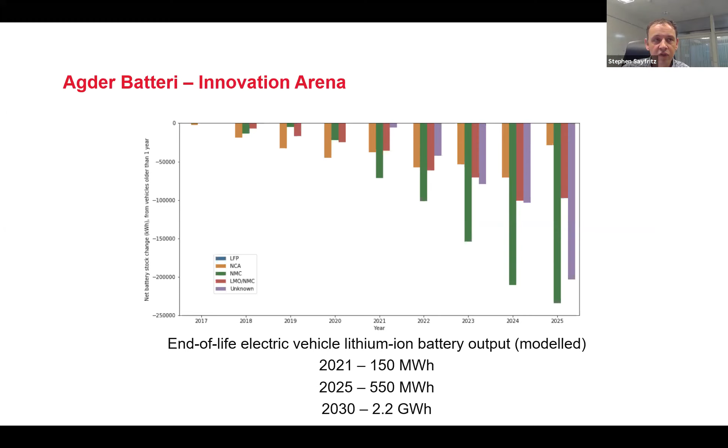When we do the analysis of what we then expect to come back from pure end-of-life batteries, not other reasons for batteries being returned from the fleet, we see there will be quite significant amounts of batteries returning within the next few years. And then there's the question: what should we do with these batteries? What opportunities are there?

When the batteries return, there's the possibility to either reuse them, which we'll speak about today, or recycle them.

Within the recycling side, there's a big initiative with a cooperation between Hydro and Northvolt, run by Batteriretur, who will speak today, to recycle Norwegian batteries and reuse the materials in new batteries produced by Northvolt in Sweden. As another quick note, today's news was that Hydro, Equinor and Panasonic agreed a memorandum of understanding to look at cell production in Norway. This would be the third initiative for cell production in Norway, in addition to Freyr and Morrow Batteries.

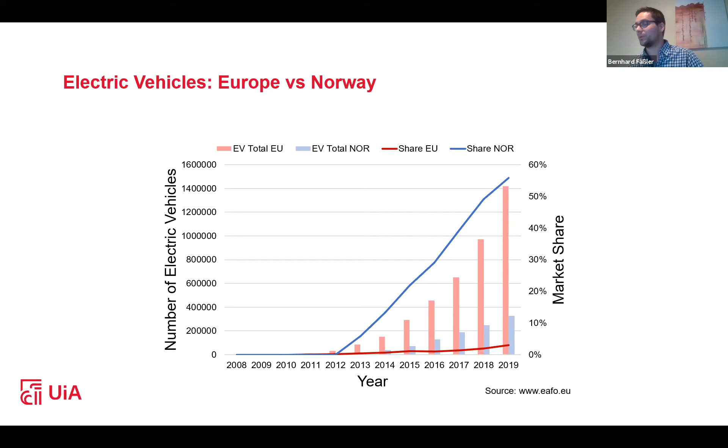If we see the share of electric vehicles in Norway, we exceeded already 50% market share in 2019, meaning that every second car sold is actually an electric vehicle, meaning there will soon also be a battery available which can be used for second use applications.

If we map that in this typical battery value chain, as you all know it, we have this classical value chain from raw material production until recycling. What we are trying to do is extend this classical value chain by an alternative route: we characterize batteries through automated disassembly and develop new second use storages, find appropriate applications, and feed them finally back to recycling to keep the raw materials in the loop.

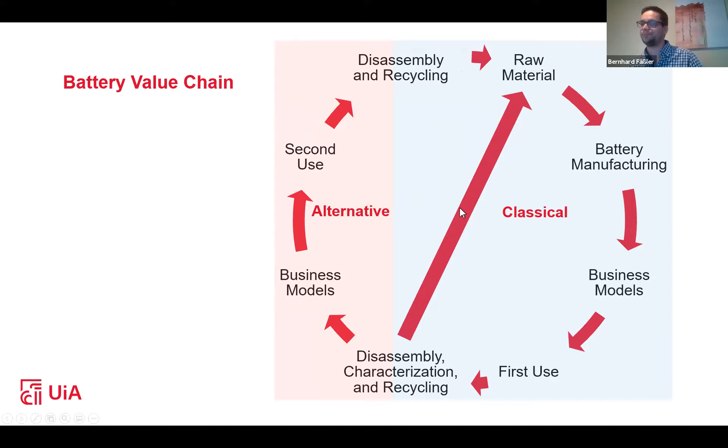In this topic, we will talk about synergies, and that's why we initiated this workshop, because we identified there are a lot of stakeholders among this classical and alternative value chain. First, there are all the businesses. There are also authorities involved, like with new regulations when it comes to Green Deal, Green Shift, and also researchers and students. What we figured out is that already some synergies are done between the industries, the same with authorities, so they talk to each other, the same with researchers. What we would like to engage now, especially with this workshop, is that we will also find synergy among all these stakeholders.

Now coming to a quick overview of what the University of Agder is currently doing in that field. We actually base all our research in terms of batteries on spent electric vehicle batteries. We cooperate with quite a lot of partners, for example, Batteriretur, Alternativ Energi. By the way, they will have a talk later on as well. Based on that, we have three pillars where we focus. First, we have automated disassembly, where we take electric vehicle battery packs apart, but more on that in detail later on in one of the keynote talks.

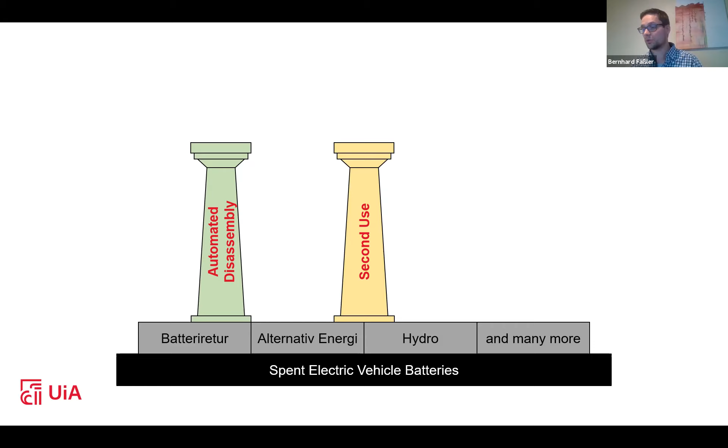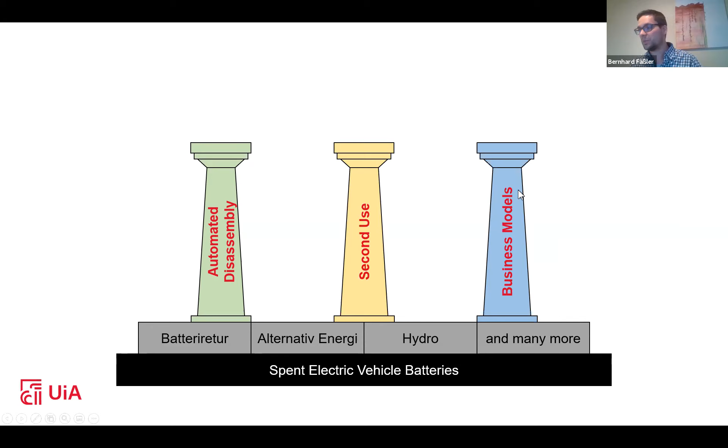The second pillar, what we are doing, that's my main focus, that's second use of batteries. So we write controllers, we develop new storages based on different kinds of batteries, and we do field tests. The third pillar is we are also quite heavily linked with the business school at the University of Agder. So we develop business models for second use and automated disassembly, and these business models also have a very strong focus on environmental aspects. That's basically what we all do under the rooftop of the University of Agder.

And now, as the keyword for today, how we can collaborate. This we will take further to the panel discussion in the end. I want for now just say thank you, and I wish you a very nice and informative morning.

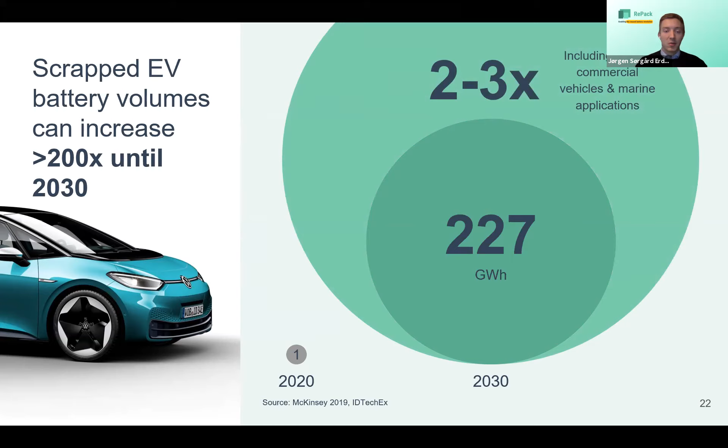And Norway is especially interesting. We have actually 10 times the concentration of the leading US state, California, where they have 1% EV penetration, we have 10%, and Oslo alone has a staggering 20% EV penetration.

Norway's volumes, as shown earlier, will grow by 40% yearly, up to 2.2 gigawatt hours in 2030.

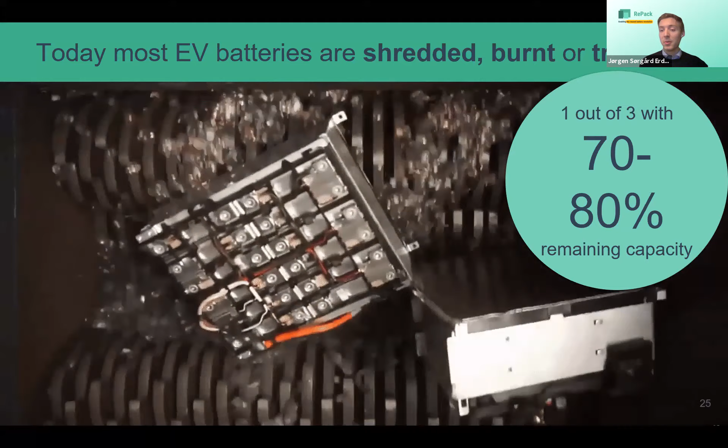So quite substantial. Today the best way we can handle these highly valuable assets, although we know 1 out of 3 of them is highly functional with 70 to 80% remaining capacity, is to shred them. And even some of them are only trashed and sometimes even burnt.

The reason why we're all here, I guess, is that we know these can bring substantial value in second life applications. Real estate, construction, and grid applications are all domains where industry participants believe batteries will become a valuable integrated part of their portfolios in the future.

Another very important part of this is how repurposed battery systems can bring a substantial reduction in carbon footprint compared to new battery systems.

Based on a study from 2017, a repurposed battery system in Norway can have up to 95% lower CO2 footprint compared to a new battery system if applied in Norway. This also supports 6 out of the 17 UN sustainability goals. So it's both a financial opportunity, if we're able to get the cost down, and a sustainable opportunity.

Today we already know there's a highly linear value chain that has dominated the industry for some time, where we just discard the batteries at end of life cycle. Now a circular value chain is being built with recycling, and Hydrovolt is one example of that.

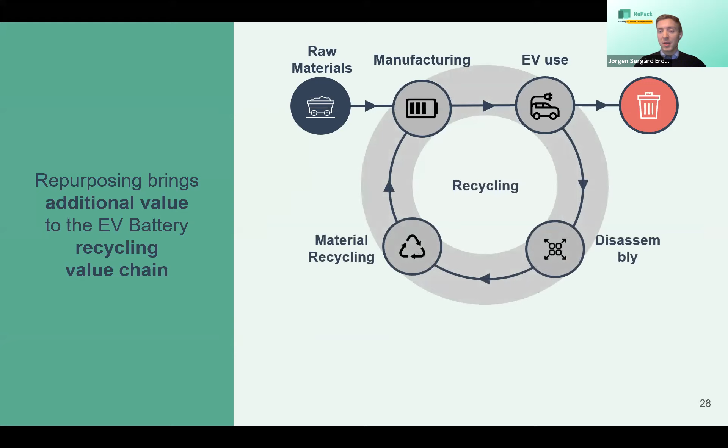We saw an opportunity to piggyback and build on this value chain, adding repurposing onto it - testing and sorting, reassembly and operation - thus maximizing the value of these assets before being wasted.

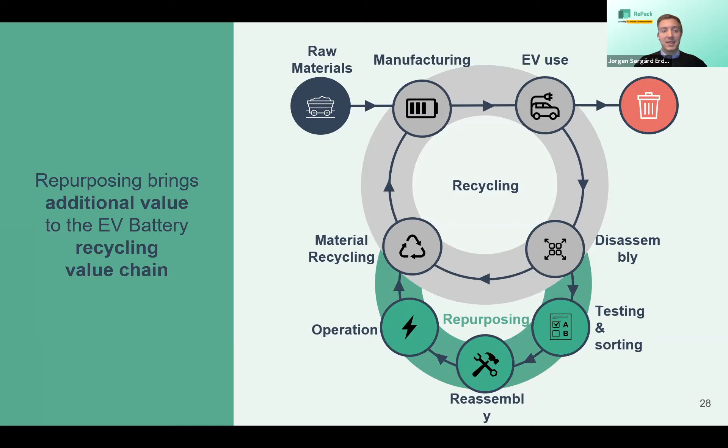Today this is not something new. This has been done, and Alternativ Energi, who will speak after us, knows all about this. But today the issues we see, the early challenges, are especially fourfold.

There's a lot of manual operations required, one-off designs, and there's also a lack of scale to the industry, which can lead to limited operational guarantees as the systems are still new in operation. These are challenges we need to overcome to bring these repurposed systems into the money for more participants.

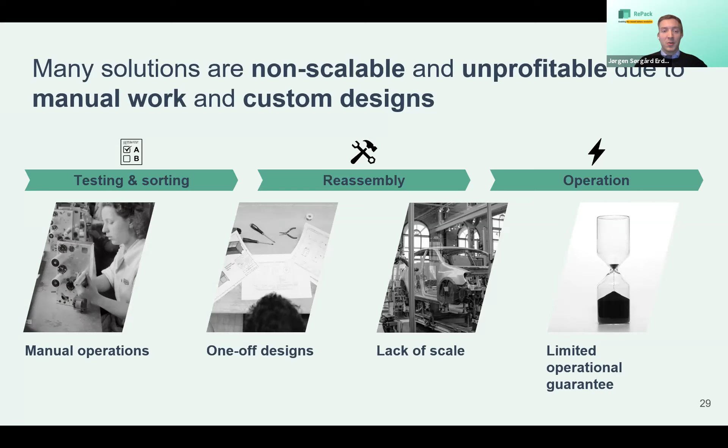And that's what we in RePack intend to do. We see that the costs of today's systems are priced significantly above what, at least by our calculations, is the commercial real estate break-even. And that also goes for repurposed systems.

We plan to use automation, standardization, and low-cost production to bring that into the money for commercial real estate, bringing a 70% reduction compared to what we see in the industry today.

We also believe we're able to sustain this cost advantage in the years to come compared to new systems. Although we know they will go down at a 7% yearly rate, we still believe we can beat that cost quite significantly in the years ahead.

And the upcoming battery directive, as most of you are aware, will likely also support and require repurposed systems to actually be reused, thus demanding this in the market.

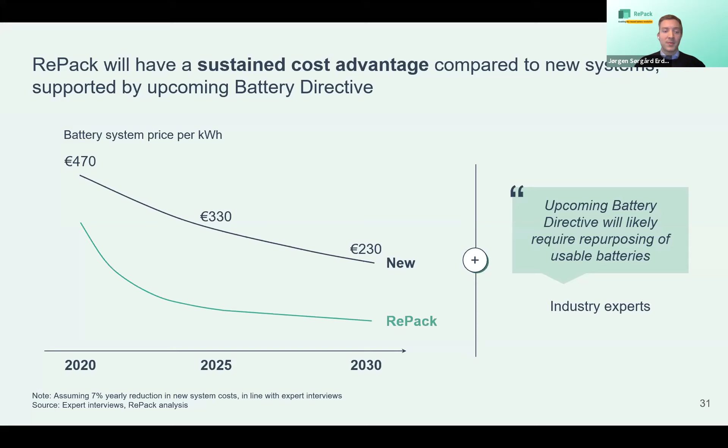So how we plan to go about this is to partner up with existing players on both sides of the value chain. On the left-hand side, we plan to partner with disassemblers or battery recyclers workshops, where we get these disassembled and tested modules. We then reassemble them into ready-made battery systems and hand them over to integrators, who install and integrate this into customer locations, companies like Wonco, GK, Bravida, etc. Then at the real end of life, we hand these over to material recyclers so that we can recuperate the materials once they're actually end of life.

So how we plan to realize the RePack concept is through a 3-step approach towards full-scale production. We currently have a 2-year window of opportunity in Norway to catch this opportunity, and we plan to grab that with this approach. First, we plan to have 2 phases where we launch operational pilots in the market, and raise more funds in between each phase in order to fund growth towards the next phase, and ultimately full-scale production in 2023.

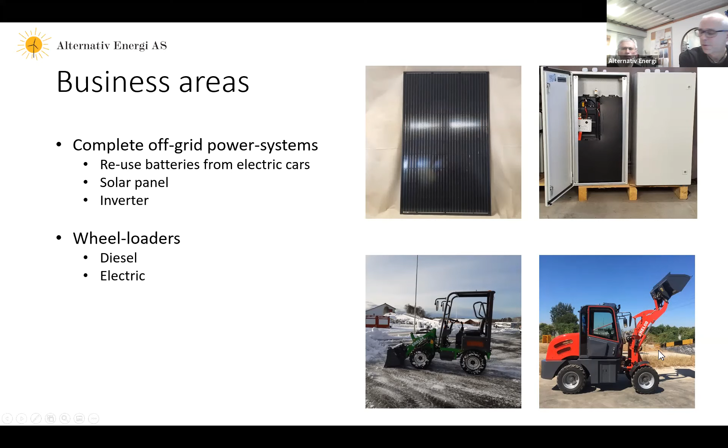Just to give a view of the off-grid power systems we are making: we have the lithium battery, which is the main component in the system, which we get mainly from Batteriretur, and we dismount into separate cells and have made our own design for making a complete battery for either 24 volt DC or 48 volt DC. We have a lot of combinations here which we can do to get enough power, enough energy. So normally one of these battery packages is around 7.5 kilowatt hours.

We have our own BMS system, which is really important for the safety of operation of the lithium cells.

We have a very long experience with this BMS system, from the beginning of 2010, when we worked with electric cars. So this is a very secure and well-known BMS system, making sure the cells are not going too low in voltage or too high in voltage, and also doing the balancing on top of the cells.

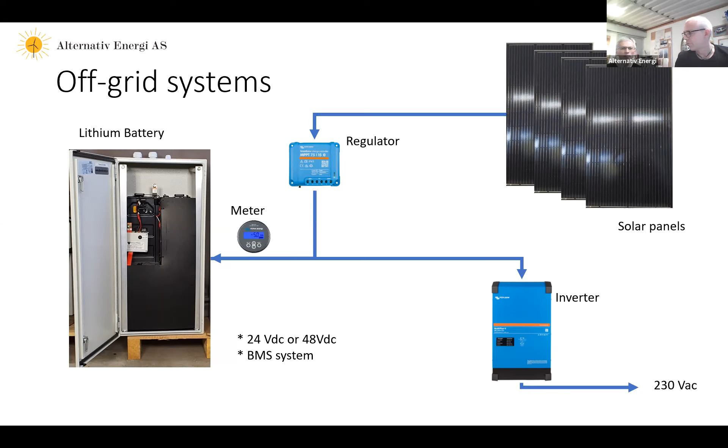We also have the waste pyramid here, and we are working at the reuse level, the second level there. I think it's important that we keep it at a high level there.

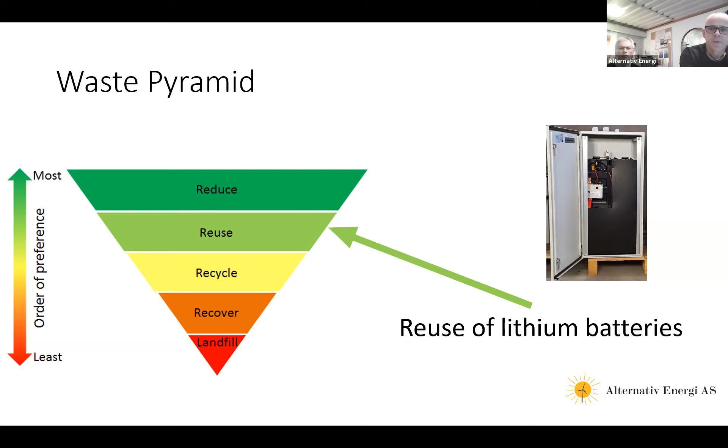Our challenges for the off-grid systems at the moment - it's the access to lithium batteries. We are suffering because we cannot get enough lithium cells, and there are several reasons for that. Some car producers do not allow cells to be reused, only recycled.

Back to the slide earlier, I feel a little bit sorry about that, to bring very good products too far back into the cycle. Another thing is that cells from car crushers and so on are sold in the open private market, and this, of course, is also causing less availability for professional use like we are doing.

This will, of course, look better in the years to come, but at the moment there's a lack of cells for us. Another challenge is that the battery and car producers are not thinking about reuse when they are designing the battery packages for the cars.

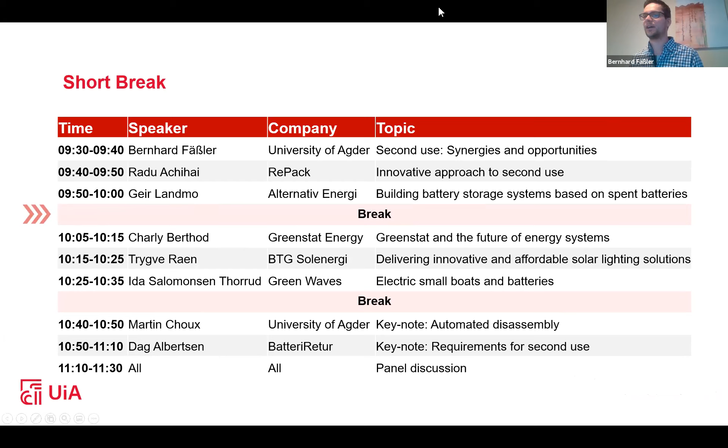I worked at TUI previously, and now I'm working in Greenstat, especially Greenstat Energy, as a project manager for solar energy, which has a very tight connection to energy systems and thus batteries.

I'll present shortly Greenstat, and that's the picture we use to describe how we see the world in the future. It will be all powered by renewable energies, and that's what we are working on: wind on land, solar energy on buildings, solar parks, and green stations—like a gas station, but for electric vehicles. We would like to electrify all kinds of transport—sea transport, air transport—and also seafood production in Norway. So that's a bit what we are working on in Greenstat.

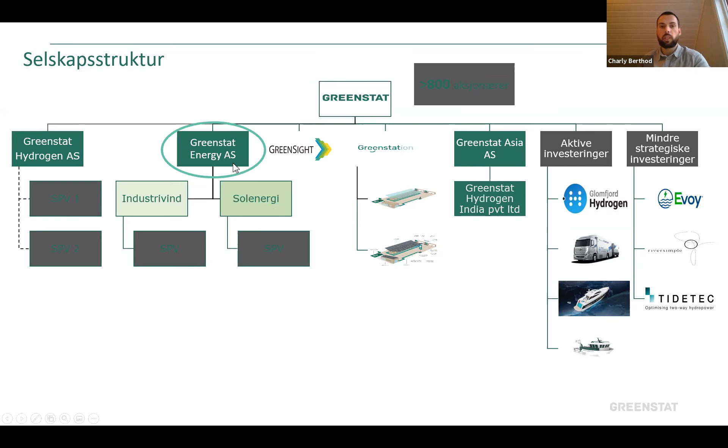The core of our business is hydrogen, as you can see on the left, Greenstat Hydrogen. There is also Greenstat Energy, Greensight which is a consultant company, Green Station which is working on the future of electric vehicle charging stations, and some other companies I don't have time to describe fully. Today I wanted to speak especially about Greenstat Energy, the company where I'm working.

A bit of background for Greenstat Energy: in 2019, Statnett came up with a report that said Norway needs 50 new terawatt-hours to electrify its society. That means electrifying transport, industry, and much more. If we add the electrification of the oil shelf, then we add 10 new terawatt-hours. At the moment, Norway is consuming 140 terawatt-hours, so 50 new terawatt-hours is quite a lot more.

So where can these 50 new terawatt-hours come from? They can come from hydropower, which is what Norway produces the most—98% of its consumption is covered by hydropower—but hydropower has very limited new addition capacity. There have been approvals for 3 new terawatt-hours. Upgrading can give up to 6 new terawatt-hours if it's profitable. New additions can give up to 14 new terawatt-hours, but these 14 will mean destruction of nature, because you'll have to go into untouched nature to get these.

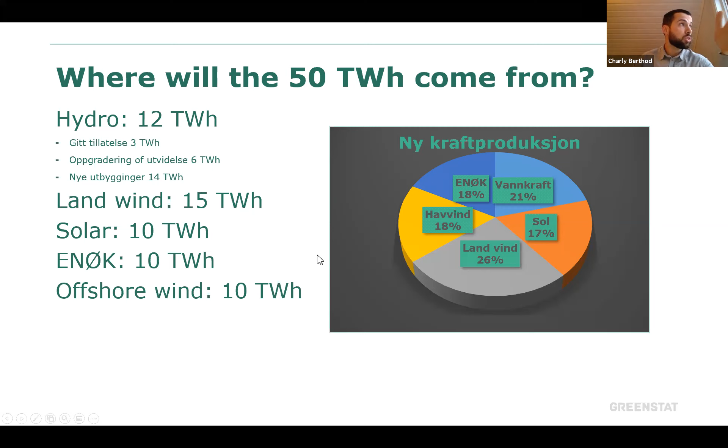Then you have offshore wind that can give between 10 and 20 terawatt-hours. Solar can also play a big role in that. It's also worth noting that new sources of energy are coming into the Norwegian mix.

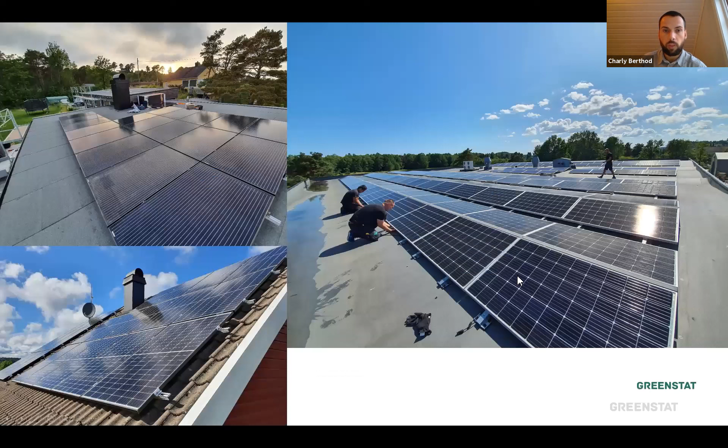Some of the big things we are working on is mainly hydrogen—hydrogen for heavy transport, like hydrogen trucks. We are also working with Vestfjorden Samband, the ferry between Bodø and Lofoten that will run on hydrogen, and we want to produce the hydrogen for this ferry. But we are a neutral company, so if we see that batteries will be better, we'll use batteries. We don't have any bias in the company, but we see that hydrogen will mainly be used for long maritime transport over long distances.

For the solar parts, we install on houses and on industries, and we have more creative projects going on, like land-based fish farms or stations with integrated electric vehicle charging.

Now I'm quite good with the time. So it's especially with houses and industries that we are considering installing battery packs. For the moment, we see that it's not profitable on grid-connected systems, because electricity prices in Norway are rather low and don't fluctuate so much during the day.

While in other countries, like European countries, you will have large fluctuations during the day that could make you want to store the energy and sell it when it's actually very profitable. So a battery system is much better in other countries. Norway doesn't have that for the moment, but Norway wanted to make companies and private persons pay more for the power peaks they were having.

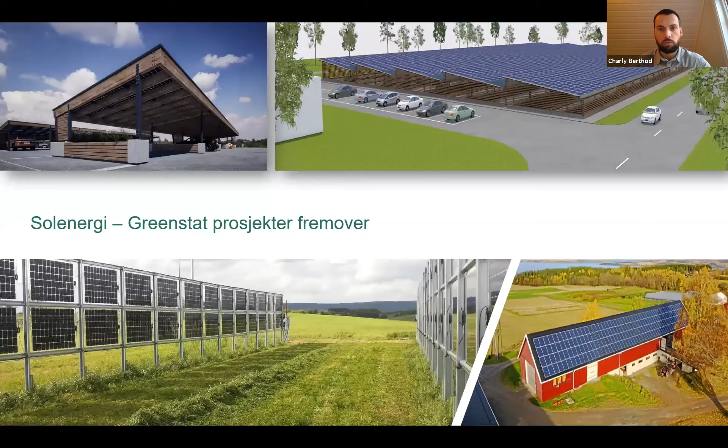Before I talk a bit more about NVE—there are already big projects in Europe. For example, this arena, I think in the Netherlands, where they will use 148 used Nissan Leaf batteries in this stadium. It's a very cool project, but more in the Nordics, there's this project by Skjold Stall, where they will build a neighborhood with used batteries from Nissan Leaf.

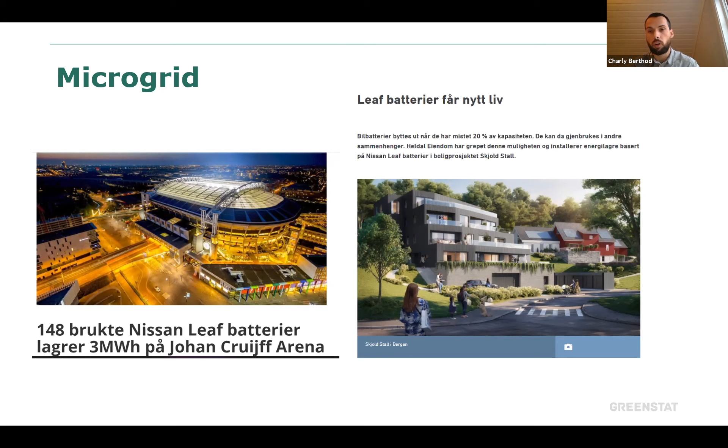So the future in Norway for batteries, well, there is this new grid tariff that is proposed by NVE, which is the company deciding a bit what we should pay in our electricity bills. Basically they wanted to make people pay less for the total energy they consume, but more for the power peaks they were having. And that was really good for battery packs.

But the first proposition they made was too complicated, and it was turned down. And now the new proposition coming is actually to have a more expensive fixed cost, which means that trying to do peak shaving has no purpose anymore almost.

So it's reducing the incentive for residential and commercial markets to use batteries to have the flattest consumption as possible by regulating the peaks, because you will not save money - they don't want to make you pay more for your peaks, they just want to make you have a fixed cost. And I think that's not really the right way to go.

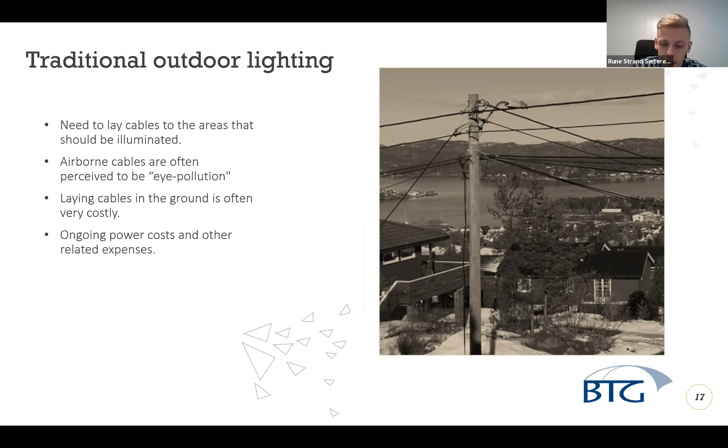A little bit about traditional outdoor lighting, as you're all familiar with I guess. These need to lay cables to the areas that would need illumination, and airborne cables are often thought of as eye pollution - not very nice to look at, as you can see from this picture. On the other hand, if you need to bury the cables in the ground, this is very expensive and also very time consuming. In addition, the costs of the power supply and fees are also very considerable. So all of these aspects won't be necessary with our Illume solutions.

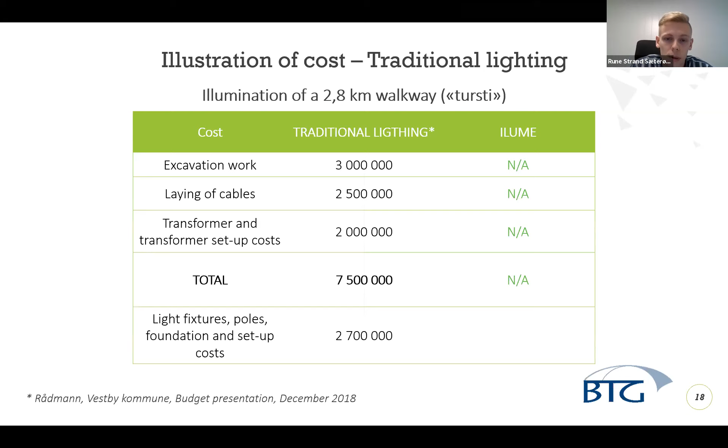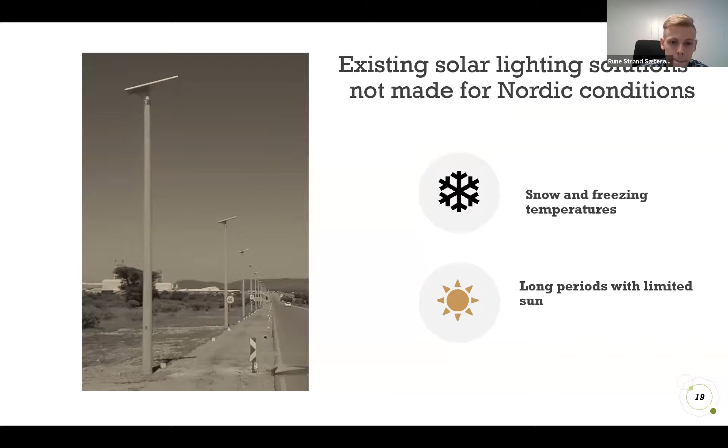So what makes our solutions unique? The battery pack has a large capacity and is robust in cold weather. Our solar panels are of the type and angle which maximizes energy production during wintertime. The panels are mounted vertically, as I will show you later in the picture. With a low winter sun, you get a perfect angle to the solar panels, optimizing energy production. You also have an intelligent design made to provide light when you need it and to minimize energy waste. So all in all, Ilume is made for Nordic conditions.

The Ilume 2.0 is an updated version of the first generation. The difference here is that you have the batteries in the foundation, at the bottom of the pole, while on Ilume 1.0 and 1.5 you have the batteries behind the solar panels on top. So it's easier to maintain, and if you have to change the batteries, it's easier to do that in the Ilume 2.0 product. The pole is also different in the 2.0 - it's coned, starting with 20 by 20 at the bottom and ending up being 15 by 15. So that's also an addition.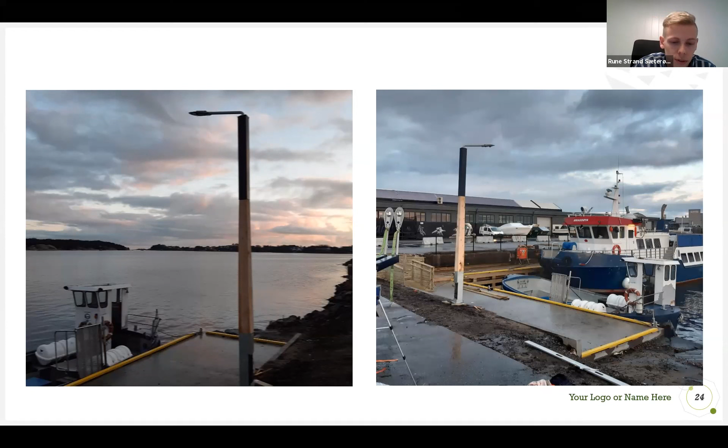This one is outside a nursing home in Kristiansand as well. And this one maybe some of you have seen before, because this is placed at the UiA - it's the Illume 1.0 model, in many places around the university area, including this outdoor fitness park.

This one is from our local place in Birkeland. We have also made deliveries to Sweden with our partners, Amparo Solutions.

This picture is the first one I showed you. And this one is taken from Mikragar Hotel in Kløfta. Here they got Illume 2.0 painted in a specific color to fit with the environment and the color of the hotel.

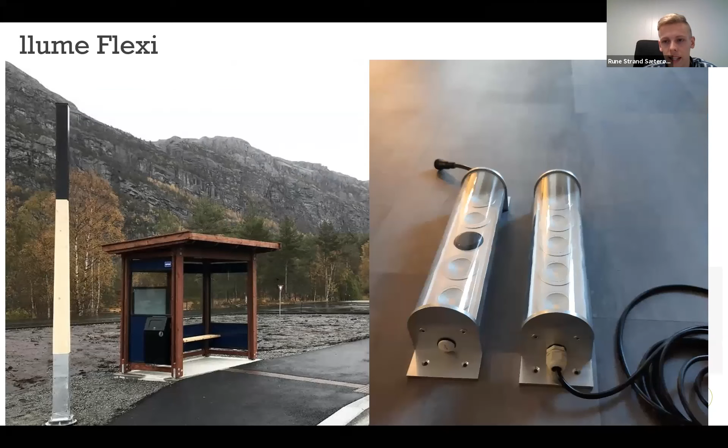And this is our Illume Flexi and the belonging LED lamp on the right side. We also have a new product called Illumidret, which can be used for example on golf courses or other sports areas.

We are also, as we speak, developing a new IoT system, Internet of Things. This is a web-based control system which will make the programming of our products a lot easier. You can do this from a laptop or mobile phone, or do it at home, instead of today's solution with a remote control, where you have to be physically near the poles to program it. This is also much more energy efficient, so this will be a great addition for us.

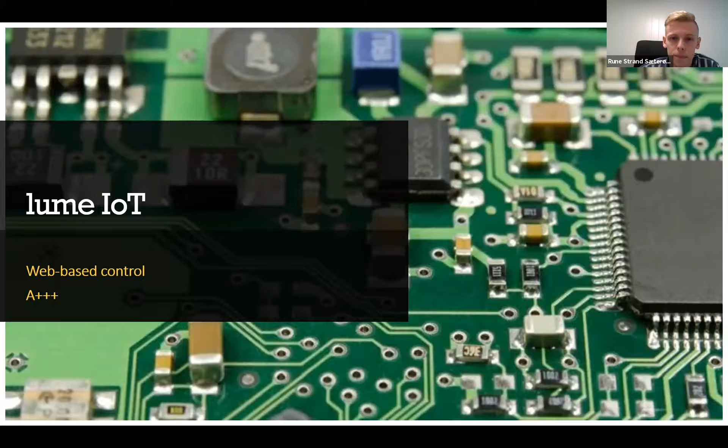So last but not least, we are participating in this project because we find it really interesting, looking at the opportunity to use second-hand car batteries in our solar streetlights. As we are an innovative company, we would like to make this happen. So the questions we're asking ourselves are: can second-use car batteries be used in our solutions? Is it possible to develop an economical value chain for this? These are the questions we need to answer. Just a specification, we are not at all battery experts, as many of you guys are, but we are open to collaborate and are excited to continue working with this project. So yeah, that was all I had, I think. Thank you very much for your time.

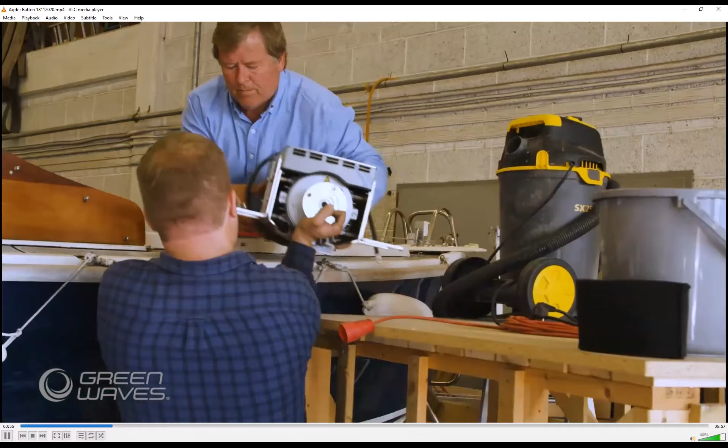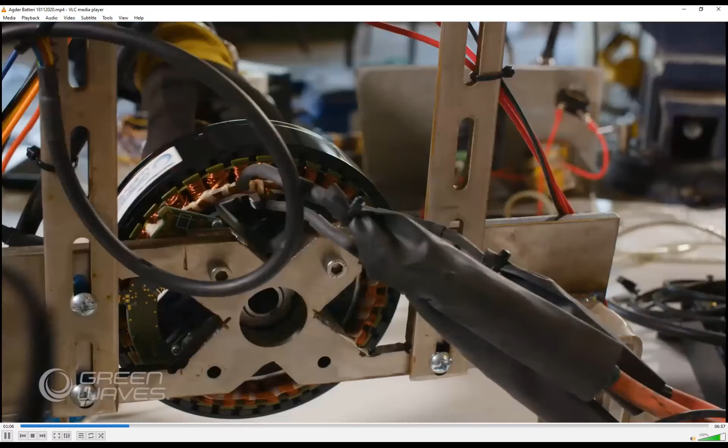Our business model consists of three main components: converting existing boats, developing and selling new boats, and our core activity, which is developing and selling our own full electric propulsion systems. We started with our Greenwaves 601 but have taken it a step further with the development of our new Greenwaves 630X.

Norway's first serial-produced electric boat in aluminium, designed to handle the rough northern conditions. This is a 21-foot open boat with a specially developed hull, with main focus on developing the most energy-efficient hull possible. The result is a range of up to 100 nautical miles on one charge. It's important to deliver on the three criteria: speed, range, and price. We believe the best combination to deliver on all three is to limit the maximum speed to about 15 knots.

The hull is made of recycled aluminium. Our two main reasons for choosing aluminium are that you can recycle the material repeatedly without losing strength or quality. It is also less labor-intensive to produce, enabling competitive production in Norway to create more green workplaces.

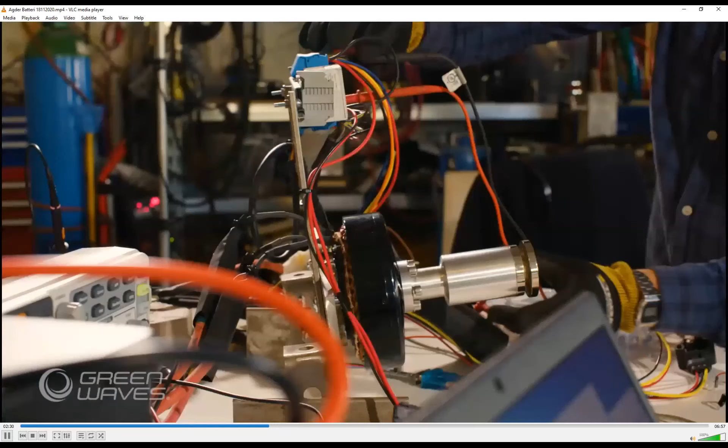We have now started developing our own optimized electric drivetrain with the Greenwaves 630X as test base. The propulsion system will be universal and therefore adaptable for a variety of different types of boats, both new and existing models. The Greenwaves system will come with an option of hydrogen fuel cell as a range extender, which we strongly believe is the future.

Over the last years, we have seen a development in the boat industry where the size of engines increases every year. At the same time, more restrictive speed limits are frequently introduced. Greenwaves believes we need to stop and consider what boating is really about. We need to rethink how the boat industry affects the choices of boat buyers and how we can make it more sustainable.

We believe the future needs green solutions and want buyers to have the possibility to choose an environmentally friendly solution, where the focus is to be close to nature, with a silent experience for both passengers and marine life, without all of the emissions. There is literally an ocean of opportunities out there. We just have to seize them.

We do see both challenges and drivers in the second-use battery sector. In the end, for us, it's all about making electric boats more attractive for our customers. So we in Greenwaves have decided on only using lithium iron phosphate batteries in our boats. This is mainly due to safety and reducing risk, because in the leisure boat market we are currently lacking specific legislation for electric boats. That doesn't mean we don't have regulations to follow, but we have to take more precautions.

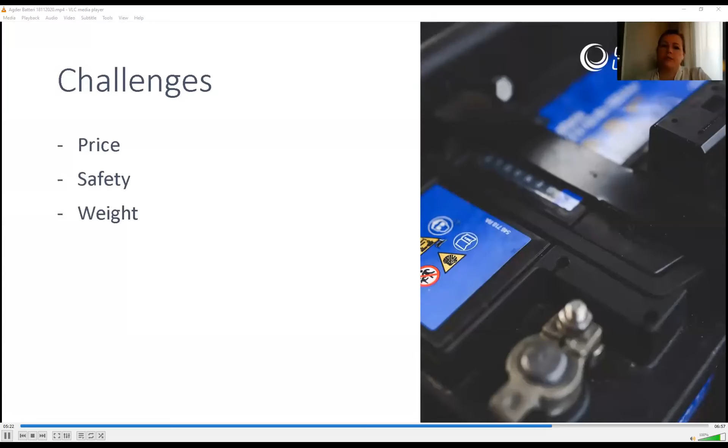So the three main challenges as we see them are price, safety, and weight. The price has to be significantly lower than the price of new batteries, which means that the process around, for example, restacking the old batteries needs to be more automated. And there's the safety aspect—we need companies that have high quality control and the needed competence, such as Batteriretur. And there's the weight: the older batteries have a higher weight than the batteries we see in the market today, which can be challenging.

And then we have the drivers. In the bigger picture, it's of course all about the environment. But in order to get the customer on board, the price has to be right. So a significantly lower price than new batteries would definitely be a trigger for the customer.

And then there's the sustainable aspect of the product. The used batteries are a great resource that's already been produced and have a lot more to give. So that's definitely a huge driver in using the batteries repeatedly.

We also see opportunities in using our boat batteries in a more sustainable, circular way all year round. If the customer isn't owning the battery in his or her boat, it will decrease the price of the boat and also reduce one of the big hurdles around battery expected lifetime and so on. This would make electric boats more attractive and also accelerate the green shift at sea.

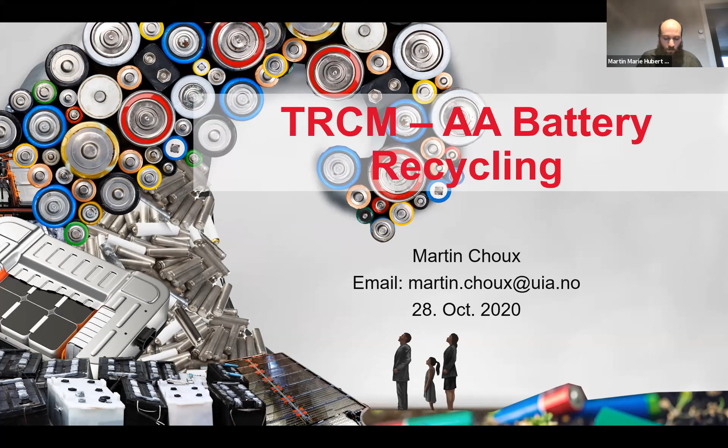So we know that research and education in mechatronics, AI, and automation is necessary to establish battery recycling and reuse business in the south of Norway, especially because it's a region with high labor cost. This is the aim of the newly created Top Research Center Mechatronics at UiA. We have this application area, which is called battery recycling, and we want to develop the technology to help in recycling and reusing these batteries.

So we started our work in 2018, participating in the project which is called Lithium-ion Battery Recycling.

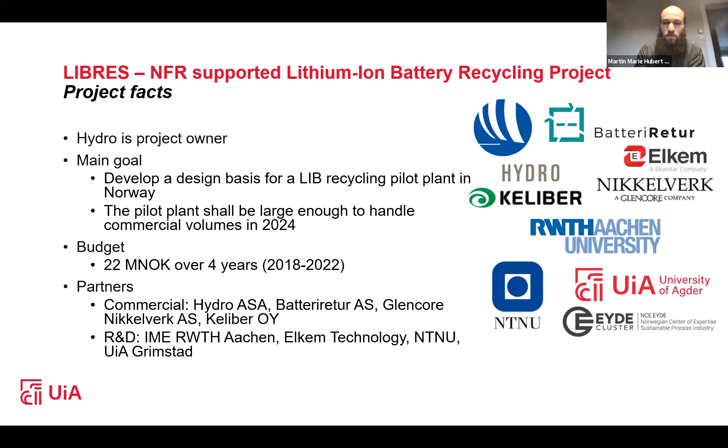And now we are under the third year of this project. This project is owned by Hydro, and the main goal is to develop and commercialize a new LIB recycling process that shall be suitable for large future volumes and have a much higher material recovery rate than today's state of the art. Here you see the partners, and UiA is responsible for work package 1 in this project, which I will detail a bit later.

We know this project has already been successful because a new company has been created based on these results. This is Hydrovolt, which will be building a new factory in Fredrikstad to recycle the batteries of electrical vehicles.

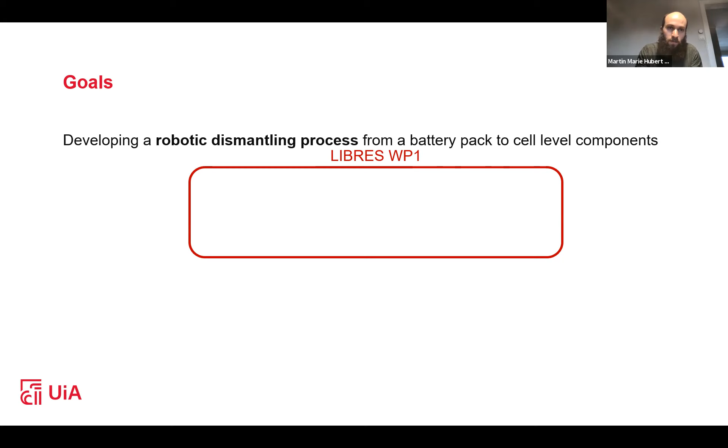So work package 1 in this project is to disassemble batteries, but also automatically discharge and characterize them. We start from an electric car and get the pack out of it. This has to be disassembled into modules, and each module includes several cells. This process has to be suitable for the large volumes coming, and it has to be able to deal with a lot of varieties of batteries.

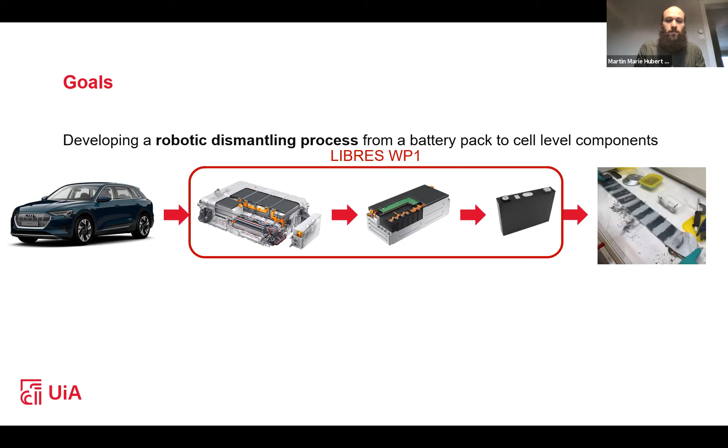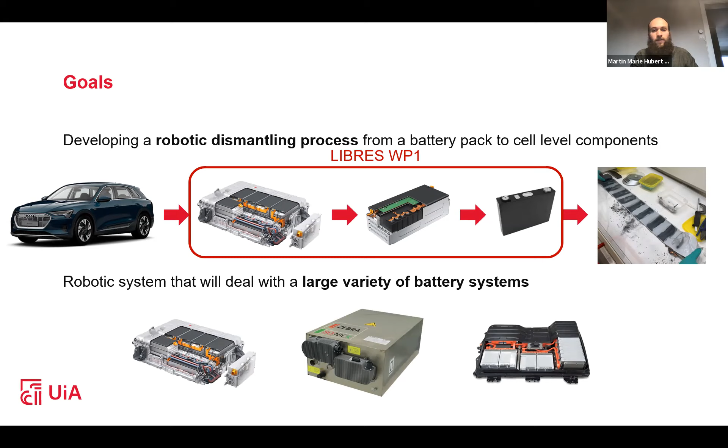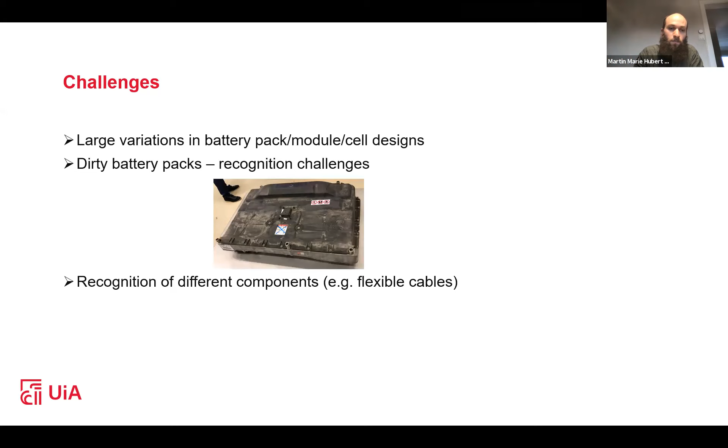One step which is common in repair, reuse, and recycling is the dismantling of these batteries, so this is a crucial step in the process. The challenges are that batteries come in a large variety of models. Each car has its own design, which may differ depending on the year it was produced, and it comes in different conditions - it can be dirty or deformed. We have to recognize different components that can be more or less challenging, and the process has to be fast and safe.

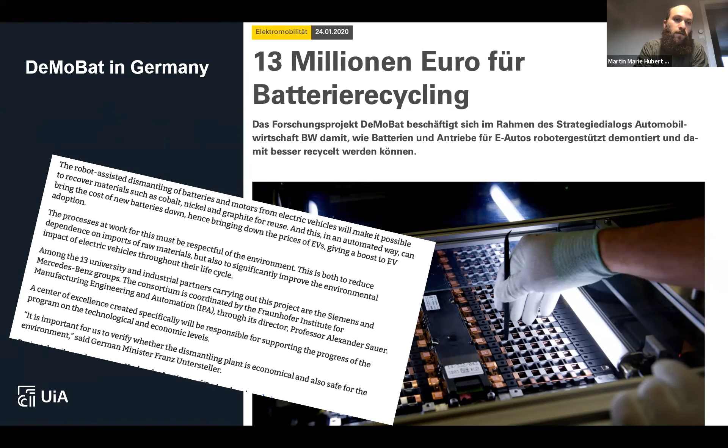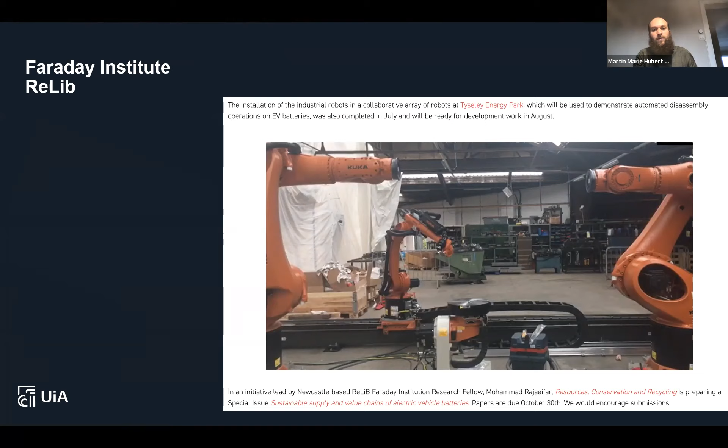This is a topic gaining a lot of popularity this last year. For example, beginning of 2020, in Germany they started a new project with 13 million euros to automate this process of battery dismantling. We also have Northvolt, working on producing new batteries while at the same time recycling them with automated dismantling and crushing. And there's a lot of activity in England with the Faraday Institute, which was quite early in this topic and has already published several articles. There is much more work that people might not be aware of, but it's gaining a lot of popularity.

So what we are doing at UiA: our approach consists of first making 3D scans of all the components of specific battery packs like the e-Golf and Nissan Leaf, which will be used later for training the cognitive algorithm. Then we create disassembly plans for specific battery types, and the next step is to connect all the different components together in a robotic operating system.

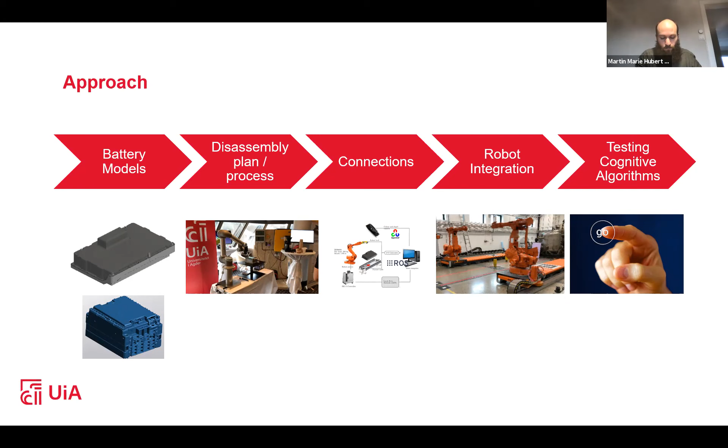We have a state-of-the-art 3D vision system connected with a robotic arm, a table fixture to hold the battery or pack, and tools to cut connections, grasp, place, and remove parts. We are building different robotic cells at UiA to implement and test these operations. We now have a lot of robots available, and we will have maybe 3 or 4 different cells that will perform different operations in this dismantling process.

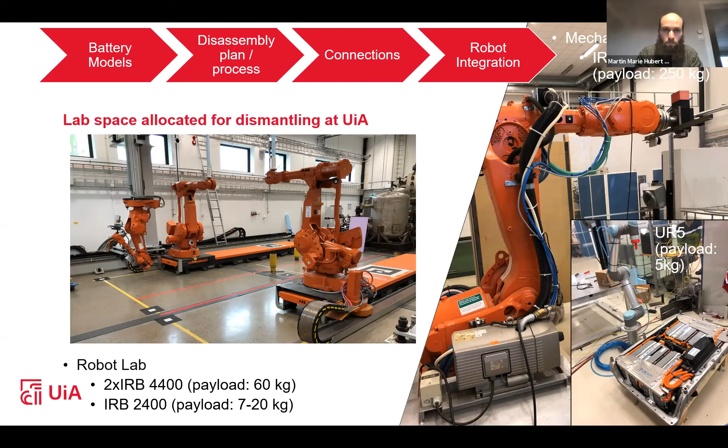Next, we implement and test different cognitive algorithms for detecting objects in 2D, segmenting the objects, and estimating the location of each recognized part. Then we decide automatically the disassembly sequence using decision-making algorithms, and finally plan the path and operation - where to cut, where to grasp, or how to remove the parts. So we have some preliminary results - I will show you a small video here.

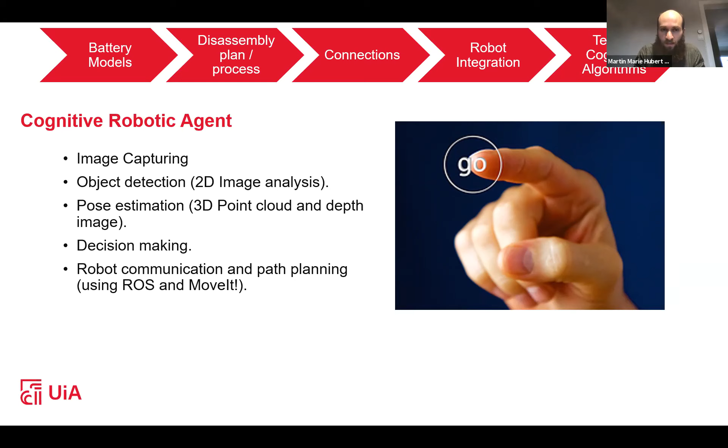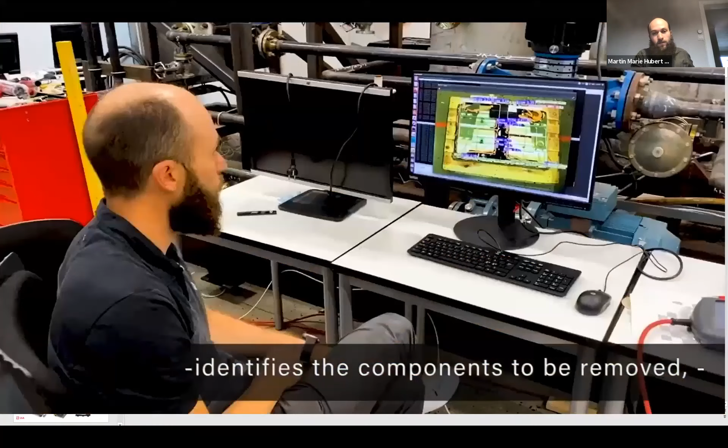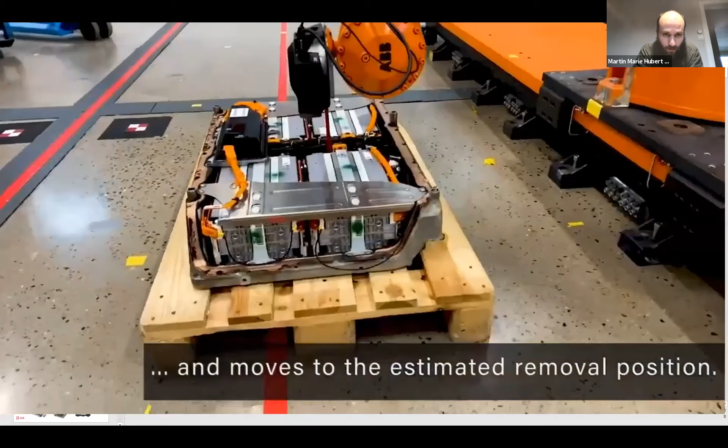We want to implement a process that doesn't have a predefined path or assembly. The first thing is we take pictures of the battery pack, at least three different sections. Analyzing these 3D images, we can detect where the different parts are that we want to remove - modules and box. Then we move the robot to the precise location of each piece that has to be disassembled.

So with this process, we have a flexible system that is able to deal with any initial position of the pack or the components inside it, whether there are missing components or not, and if components are overlapping, deciding which order to remove them. In the next part of this project, we will implement tools to actually cut the components and grasp and remove the parts.

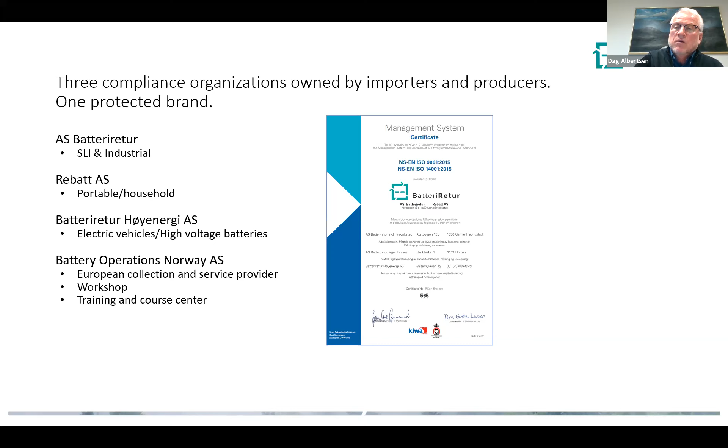Can you go to the next one? Thank you. The company has this department in Sandefjord called Batteriretur Høyenergi. This is about lithium-ion batteries from cars. We started, as you see, 7-8 years ago with this.

It started with some 100 batteries, in fact, from one producer that asked us, we have some problems with some batteries, what can we do with them? And we started this project related to that, and started this dismantling and all the other things that we have been doing later on.

The main focus is on electrical and hybrid car batteries. Batteriretur has agreements with almost all the producers and importers, at least in Europe, and some from Japan. As we know, there will be a lot of Chinese cars now, so we will see what happens with them. But we have agreements with them regarding collecting all the batteries that are taken out of the cars for some reasons, or at the end of life of the cars.

But lately, let's say this year, we see there is some increase with marine and industrial batteries. There are some truck importers that have lithium-ion in trucks, but mostly there is an increase of marine batteries. For us, a marine battery is almost the same kind of work as electrical and hybrid car batteries. But marine batteries always come in modules, they are not bigger than one module, but one module can be, for example, 24 cells or even more cells in one module.

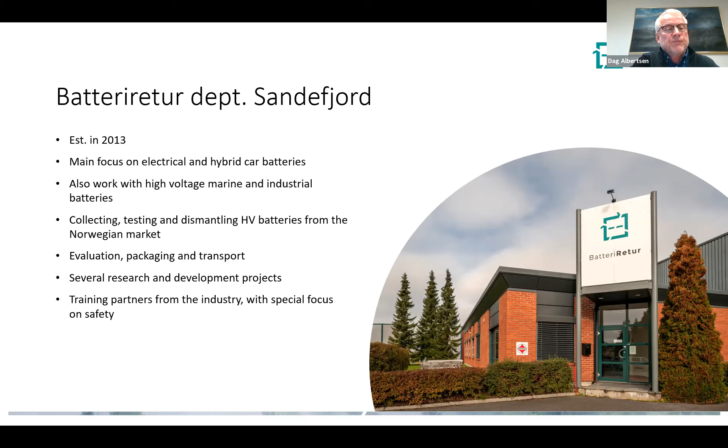I think we go directly to one of these projects we've been working with for about 3 years now. It's an R&D second life setup. The main office for Batteriretur is in Fredrikstad, in the harbor part there, and we've built up a storage system that works together with solar panels on top of one of the big buildings.

It's been in work almost 2.5 years from the first part we put in, and it's been half a year since we put in the third part, because in that project we are using battery modules. We always use modules, but of course we've done something with cells too. The modules come from 3 different car producers, and also 3 different chemical solutions and types of cells.

That's a bit interesting. One of the meanings of this project was to show it's possible to have different kinds of cells from different producers working together. But it's important to say they are not working together in the same module or system. There are 3 separate systems, each with its own BMS, especially made for its chemical solution and things like that.

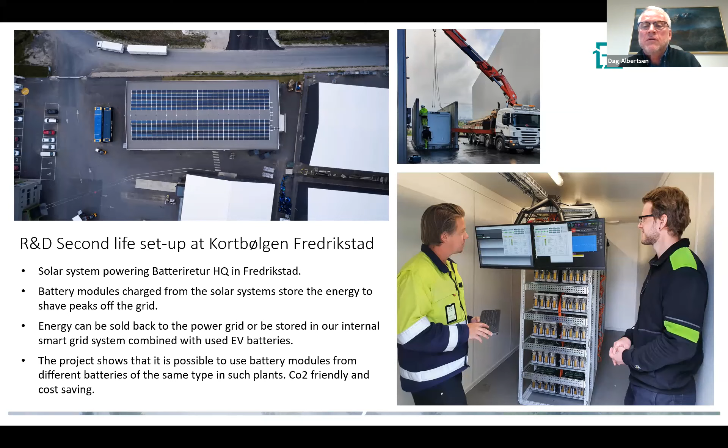We see it works very well. There are some computers there, and we can monitor it from Sandefjord too - in fact you can see it everywhere you want and control this system. It's almost like Tesla controlling the battery in the car everywhere in the world - we can do the same here. I can open my telephone, look at this and see how it is. I can look at each cell, the temperature, and whatever we want to see.

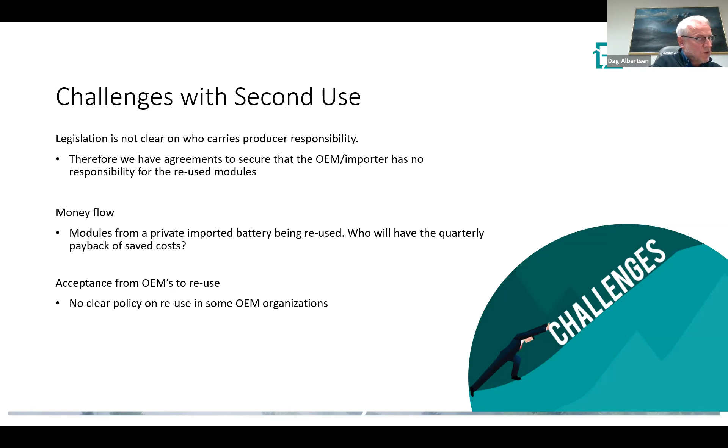So if the market is such that there's some need for this for second life, I think there will be a possibility to use it for second life. Okay, we can go to the next one.

Some details in Norway, at least: the reuser company, or other companies that want to use this product, these modules or cells, need to have a written contract with Batteriretur. We have a standard contract that we use for that.